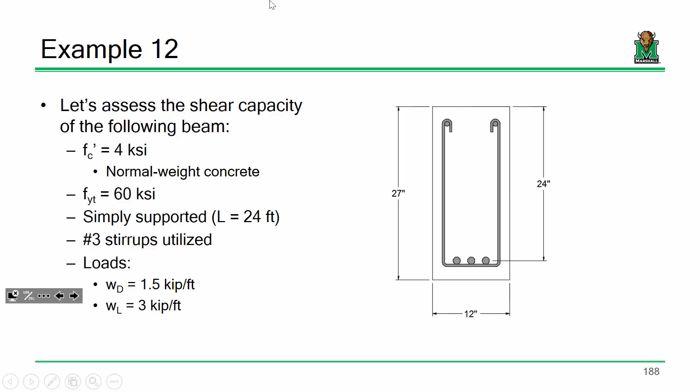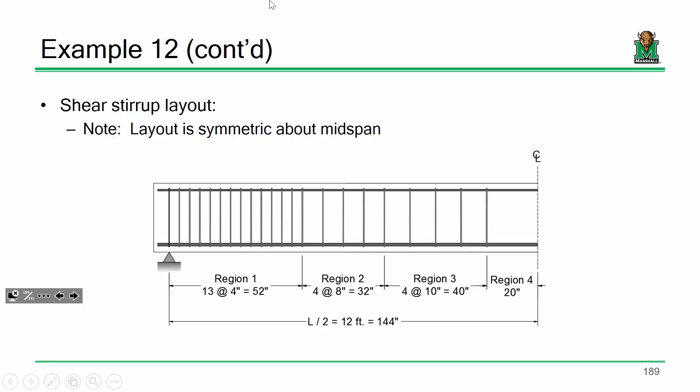So let me start off here. If you recall last time, what we had done is we had taken a beam that had various regions of stirrup spacings, and then based on that layout, we determined the shear capacity along different regions. We noticed that different regions got weaker as we went down the beam because they had fewer stirrups. But that was sort of by design, because if we look at the shear demand, the loads on the beam, it made sense that we spaced those stirrups out as we got away from the support, because the shear goes down away from the support. So as long as our shear capacity is higher than our shear demand,

we're happy. Kind of like economics, right? Supply and demand. You didn't learn anything? See, I'm remembering stuff. It's like a personal victory every time I remember that I need to take attendance.

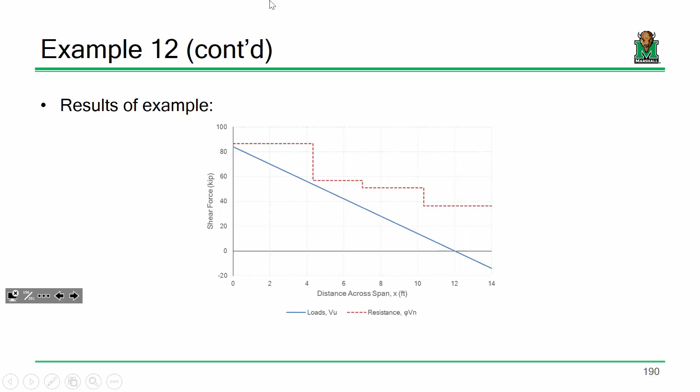Okay, let me turn to the example at hand. Let's talk about how to design. Let's talk about how to actually lay out shear stirrups for a given beam, a little more holistically. I think by now, if I give you a beam and I say the beam's 30 foot long and it's got a factored load of 4 kips per foot on it, you all can size that beam. You can tell me the width, the depth, how much tensile steel needs to go in it, etc. Now what we've got to do is take that design and reinforce it for shear. So that's what I want to talk about.

Remember that our primary goal in any design scenario is that our factored resistance has to be greater than or equal to our factored load. Our factored resistance, if we're talking about shear, is the factored resistance provided by our concrete plus the factored resistance provided by our stirrups.

In design mode, one of the things we need to figure out is how far apart to space our stirrups. If we assume we're using number 3 stirrups, we can calculate AV and FY and all that. The only thing we don't know in this expression is S, the spacing, so we can solve for that pretty easily. That's not so bad - this is literally just algebra and solving for S.

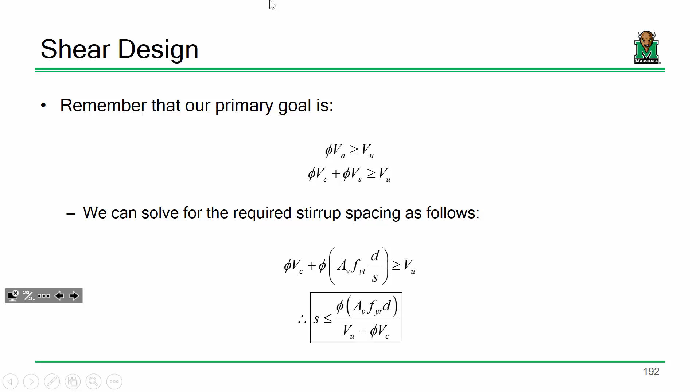Let's look at this expression. Would it make sense that if phi VC is greater than or equal to VU, we wouldn't need stirrups technically, right? That's a fair point just from a conceptual standpoint. However, you all have seen footage of what it looks like during a shear failure, and it's not pretty - it goes quick. So what ACI states, just to be safe and on the side of caution, is that you must...

provide stirrups anywhere that our shear is larger than half of phi VC. So there's going to be a region of the beam where we technically don't need stirrups from a capacity standpoint, but we have to put stirrups there to meet the requirements of the spec. We don't need them for capacity, but we're putting them there anyway because if something were to go bad, it would go bad quick. So that's provision number one.

All right, provision number two: we have to provide stirrups everywhere along the beam. However, if we start getting into contact stresses and bearing stresses right there at that support, it can take some time for those stresses to actually propagate throughout the beam. So the way ACI allows us to kind of take advantage of that is they say...

that we're allowed to actually use the shear value right here to begin our design. I know the shear diagram continues up and is technically a little larger right here, but because we have bearing stresses and it has to propagate throughout the beam, it's kind of like shear lag in a tension member. You know how we put holes in the tension member and it took time for those stresses to propagate throughout the beam? Well, if you've got a support right here and you're applying a shear force, those stresses sort of have to propagate before the beam is experiencing that pure shear.

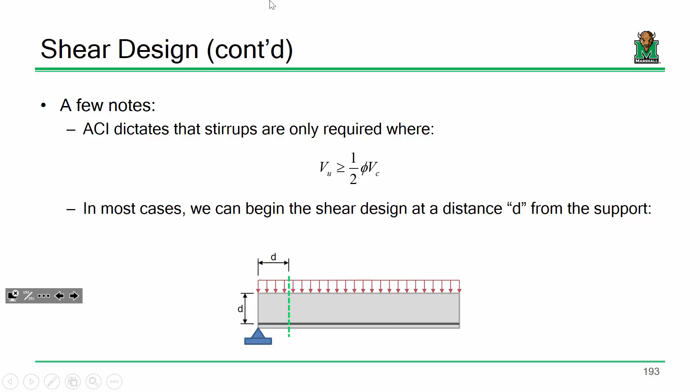So what ACI states is that D away from the support, that's the shear you can use for design. I'm not saying you don't have to put stirrups here, you definitely do, but this is the value you can start to use for design. That'll make sense as we go into a given example. There are a couple instances where we are not allowed to do that - we call this an end shear reduction, and there are a couple instances where we can't.

One instance is if you've got load applied directly to the bottom of the beam - you're not allowed to do that shear reduction because that crack has the potential to propagate a little faster. You're also not allowed to do an end shear reduction on a corbel. If you remember, we talked about the 3rd Avenue parking garage, and you've got those little stubs that stick out of the columns that the beams sit on. There's a fair amount of shear in that, and you're not allowed to do an end reduction there - you have to design for the full shear, because all that shear is going right there, so you're not allowed to do any reduction for that.

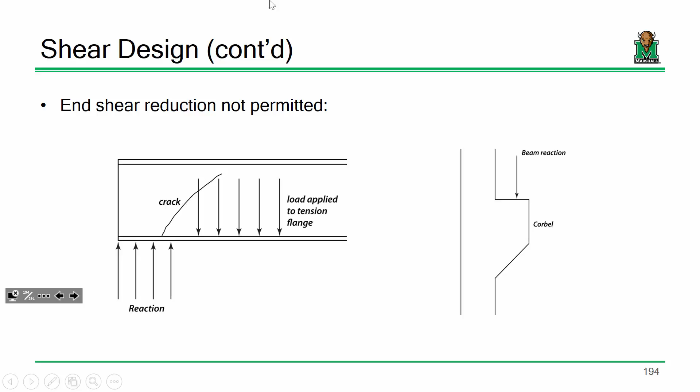So like I said, there's going to be some regions in the beam where we technically don't need stirrups, but we're going to put them there anyways just to ensure we've achieved an adequate level of safety.

So in those regions, what I'm going to do is put stirrups there, but space them out as far as humanly possible. So I'm going to use the maximum spacing.

Our maximum spacing, if you go back to some specs we looked at earlier, is actually a function of what our strength provided by the steel is. I'm going to use the conservative approach and use the top limit. So one of our maximum spacing limits is going to be based off of the capacity of the steel in shear. That's where one maximum spacing value is going to come from.

Another one is going to come from this. We didn't really assess this when we did our last example, but there is a limit that states that no matter what, you have to provide a minimum amount of steel to develop that capacity. If you recall, we had a similar limit for beams—a minimum steel requirement that we checked, and it seemed to never really matter. Well, for us, we're going to use that as an upper bound limit for our spacing in those regions where we really don't need the stirrups.

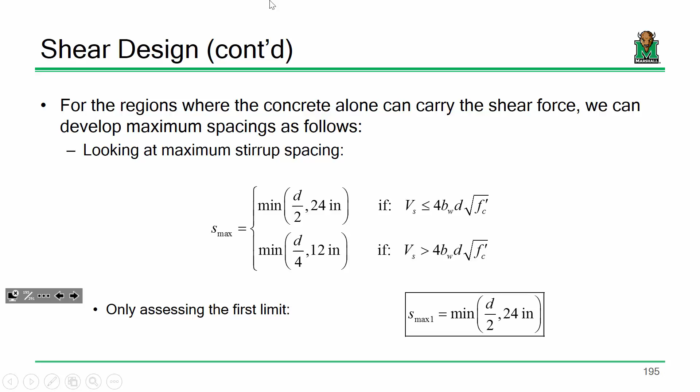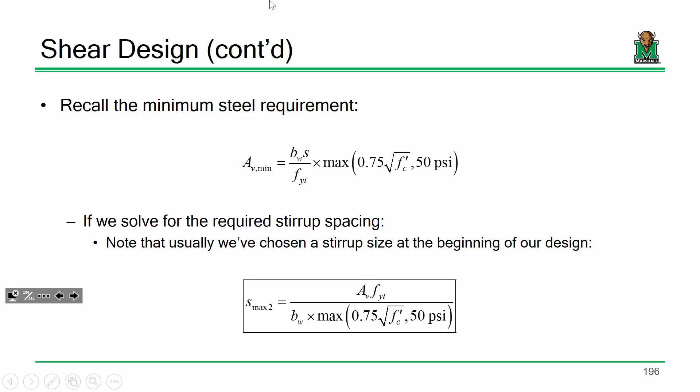Does that make sense? I think as we get into this, you'll see that everything we're about to do kind of washes out in the end. We'll get into some examples where we do this, but we're basically going to compute two maximum spacings, and we're going to take the smaller one. So let me get into the procedure, and once we start getting into some examples, I think this will make sense.

The first thing we're going to have to do is construct the shear diagram for the beam. This shear diagram is going to be fairly detailed. It's not going to be as simple as just a basic shape. There's going to be a lot going on.

We're going to have three separate sections of importance: the section of the shear diagram where we have to have stirrups, the section where we don't really need them but have to put stirrups there just for code demands, and then a section near the middle of the beam. If we're talking about just a uniformly distributed load, we'll have a section where we don't need stirrups at all. So there are three sections of the beam we have to delineate, and that's going to take a little bit of work.

So I'm going to take my time with that. I will admit I probably should have told you all to bring a straight edge, but when we start drawing the shear diagram, my advice would be to draw it on a separate sheet of paper, or draw it really big, because it's going to get kind of detailed.

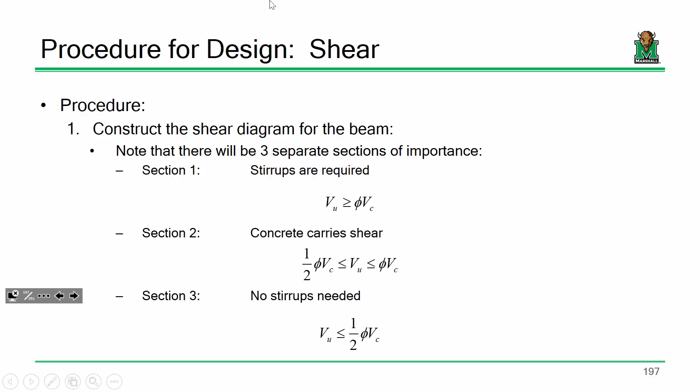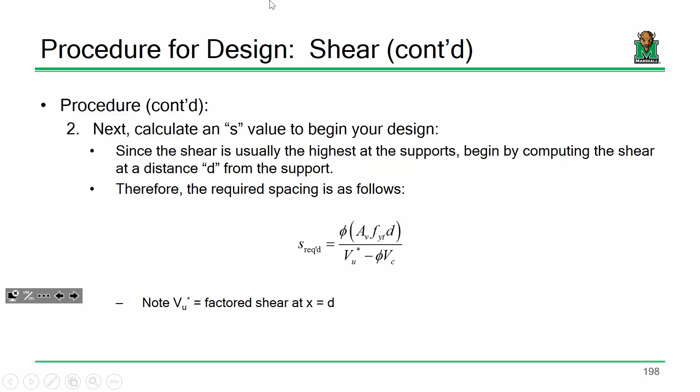Once we get our shear diagram laid out, we need to calculate an S value, a given stirrup spacing to get going. So we're going to start off with the shear distance d away from the support—that end reduction of shear. We'll use that S value to begin the design.

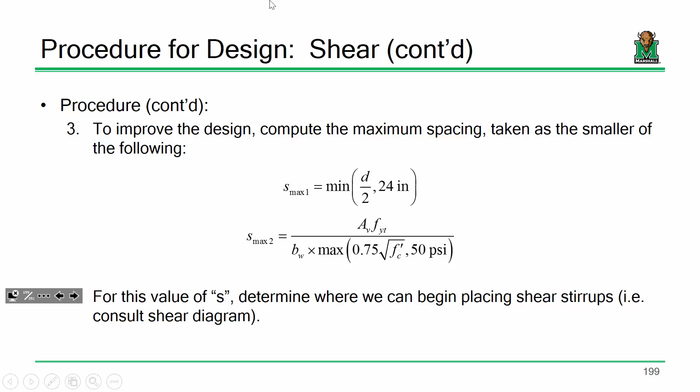And then we're going to improve upon that design by using the maximum spacing in the regions where we really don't need the stirrups, but have to provide them for code requirements and for general safety of the design. Once we've got our S values, we're going to want to start actually laying out the stirrups for the beam.

Step 6, this is where a little bit of experience and common sense comes into play, because you might be able to add some additional increments of stirrup spacing and shave off a few stirrups on your design.

Let me be clear, during homework problems I will make it very clear how many regions you need to provide, and the same thing on exam problems, because I don't want you sitting there laying out stirrups left and right. Once you can do it once, you're good.

As a final step, because we're using this limit—bless you, oh, you didn't sneeze? It sounded like a sneeze. Did you just rip a piece of quad paper off? It sounded like a sneeze. That's why I thought it was. Yeah, okay, I'm not alone, thank you. He thought it was a sneeze, so. Cordiality does not count as a mistake. I was being polite. I mean, I could have handled it differently—I said, will you all stop sneezing in my class?

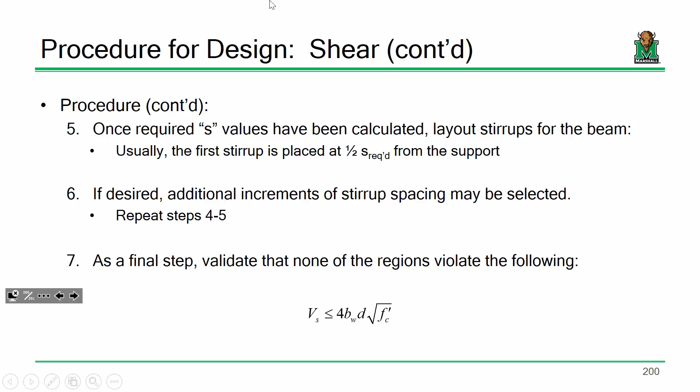As a final step, you do want to make sure that none of your shear capacities violate the following capacity. Remember, one of our spacing limits is making this assumption that this isn't violated, so you'll want to go back and check that.

I think this is one of those design procedures that really begins to make more sense when you start doing it. So what I'm going to do is get into some calculations and construct this shear diagram and lay out the stirrups for the beam shown.

So let's lay this out. We're going to design number 3 U-shaped stirrups for the following beam. So I've got a 20-foot beam, 4 KSI normal weight concrete, and 60 KSI steel.

And to keep things simple, I've given you the self-weight, or the factored load on the beam. So we're saying this is 11.5 kips per foot, so it's actually got a fair amount of load on it. And we'll say that includes the beam self-weight, so we don't need to go through and do all of that. I just want to get into the shear design. All right, sound good? All right.

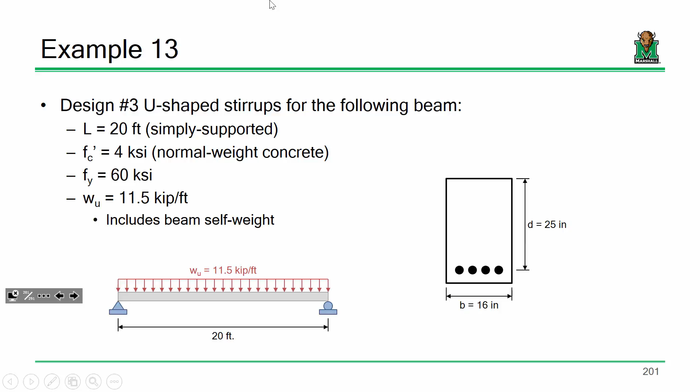One of the things that's going to be important is that we recognize the use of the equations that we derived last time. And if the shear diagram gets a little more complicated, you need to be able to handle that. So let's sort of get into it.

Well, you just need to provide yourself a fair amount of room for it, is all I'm saying, and you'll see what I mean when we start drawing it out. I'm going to actually try and use some of the straight line features in this smartboard software to try and make it neat.

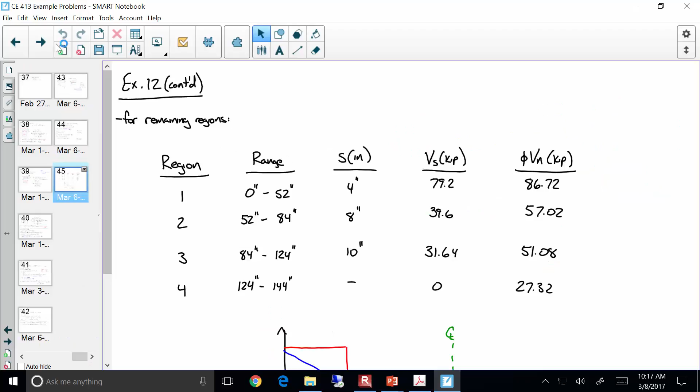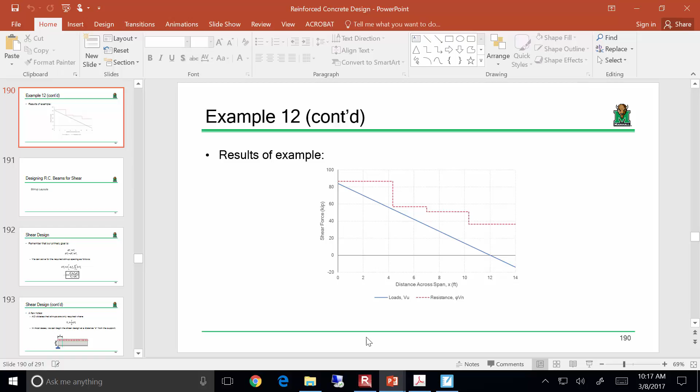I would say that's a good question. I would say that the final answer, to keep it simple, is that the factored shear capacity was always higher than the shear load, so it indicated that the beam was safe.

Okay, all right. So, example 13. All right, so I'm going to write down some fundamental beam properties just to get us started.

So we've got an FC prime of— 4 KSI. There we go. Now it's normal weight concrete, so I'm going to say that lambda is 1. We don't need the beta 1 actually for this. And Fy, or Fyt, doesn't really matter, is 60 KSI.

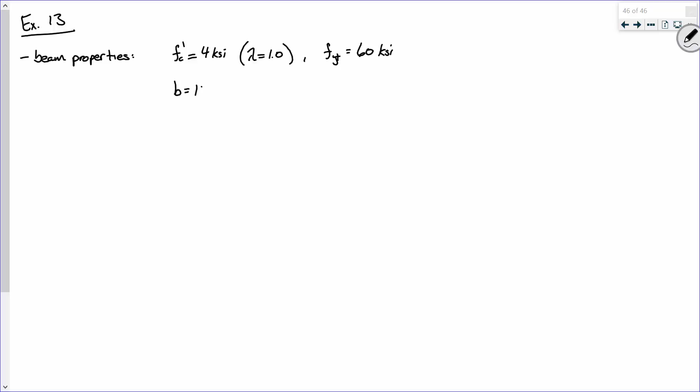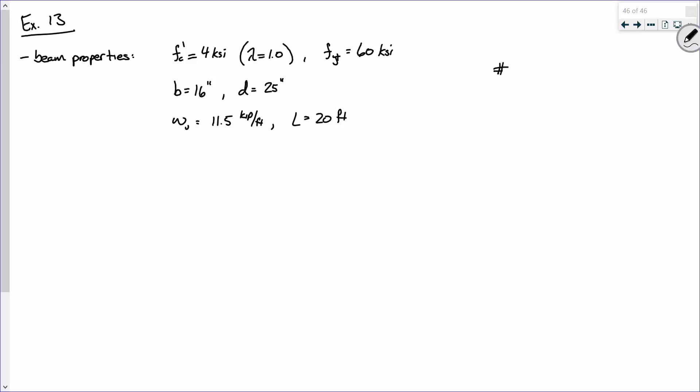All right, now we have a B value of what? 16 inches, and a depth of— W sub U is 11.5 kips per foot, and L is 20 feet. And we have number 3 U-shaped stirrups.

So what is AV going to be? See if y'all remember that. What's the area of a single number 3? 0.11 square inches, so what's AV going to be? 0.22—we'll say 2 times 0.11. Is everybody okay with that?

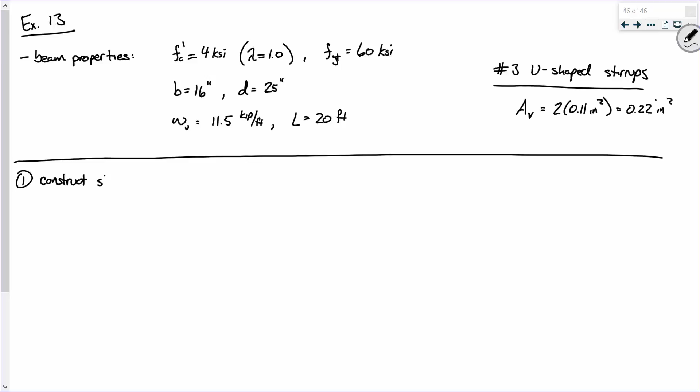Now, step 1 is going to be construct the shear diagram. Okay, now let's be clear, this is a simply supported beam.

And it's a uniformly distributed load.

Okay, now here's how I'm going to handle this. Do you all remember this? VU of X is WL over 2 minus WX. You all remember that? That was the equation we derived last time for a simply supported beam subjected to a uniformly distributed load. I'm going to use that pretty heavily throughout this example.

Now, WU L over 2, just off to the side, is 11.5 kip per foot times 20 feet divided by 2. So 20 over 2 is 10, so that's 115 kips. Does that make sense?

So could I rewrite this as VU of X is 115 kips minus 11.5 kips per foot times X? Would that be a fair way of doing that?

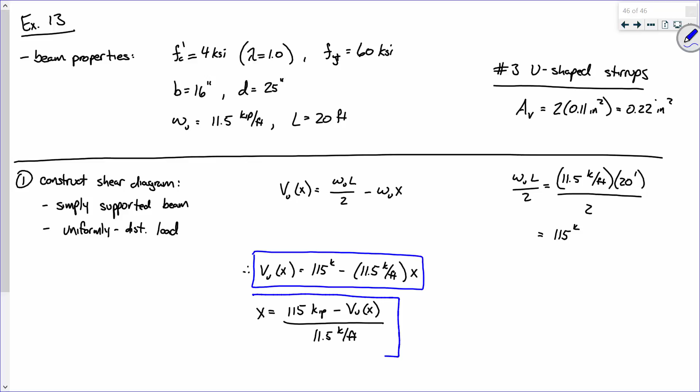All right, so is everybody okay with this equation? All right, everybody okay with that? Here's another equation that I want to write, okay? Would you agree with this? Would you agree with that? All I did is take this equation and solve for X.

So let me explain why these two equations are important. The first equation will tell us what the shear is at a given point along the beam, so that's going to be important to plot the shear diagram. This one, the one on the bottom, will tell us, okay, if I'm trying to find a given shear value on the shear diagram, it'll tell us where it is. So this will help define where we need stirrups and where we don't need them. And based on a given stirrup spacing, it'll tell us where we can start to use that stirrup spacing. So that's really going to be important for us for design.

All right, sound good? Now, let's also be clear, okay? These equations, I'm going to draw it out. These equations only work for this situation. Anytime that changes, all this is different, okay? So you need to be aware of that. Sound good?

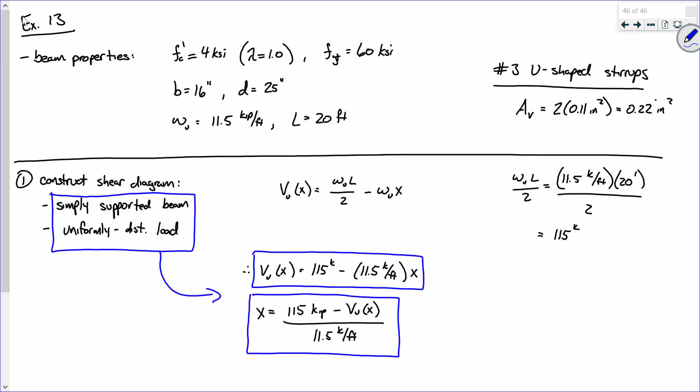All right, okay. Now, while I'm here, I'm going to compute a couple things. Specifically, I'm going to compute some stuff related to concrete capacity. So how do I compute V sub C? If y'all remember that, it is an empirical equation.

Making you all do some research through your notes. Oh no, there we go. So 2 lambda BW D square root of FC prime. So 2 times 1 times what? There we go, 16 inches, 25 inches, again be diligent on that. Times the square root of what? There we go, 4,000. You put in PSI, you get out PSI.

What do we got? Now we'll just keep it to the nearest pound. So is that, everybody got a second on that? All right, so that's in pounds. So in kips, well here, we'll just do this down here. In kips, that'd be 50.596 kips. I'm gonna keep the decimal out a little bit. Now that's VC.

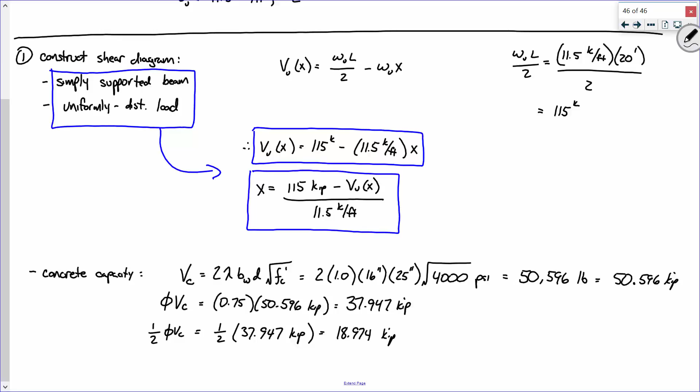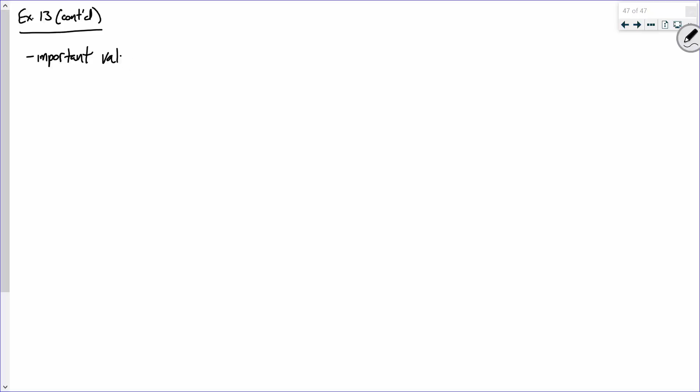Okay, so what I want are some important values for plot.

The first thing that I want is VU star. Now, VU star is just whatever the shear is at x equals d. Since this is a function, we'll say x equals d.

Now, what was our equation to determine shear as a function of x? We wrote it down a second ago: 115 minus 11.5x. Y'all remember that? So to find the shear at x equals d, I'll say it's 115 kips minus 11.5 kips per foot times d. And what's d?

What's wrong? There we go. This is the type of stuff that will mess you up on an exam right here. Okay, so make sure you're aware of that. So what do we got for VU star?

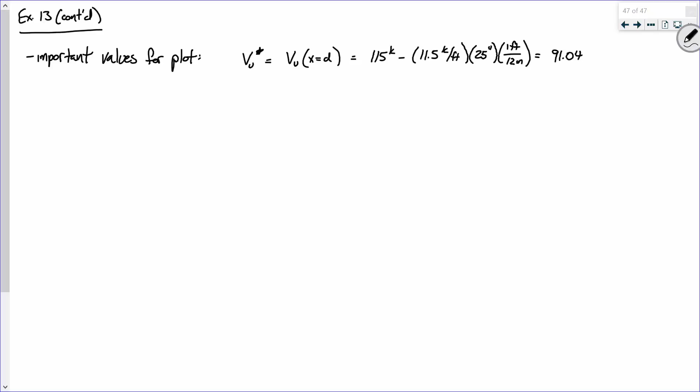So when we start spacing out stirrups, we're going to start based on 91.04 kips. We're going to see how that goes about here in a second.

Now, that's one value. I also want to know the x at phi VC, and then I'm also going to find the x at half of phi VC. So now how do I find the x at phi VC? Well, what's the equation for x?

Essentially another way of interpreting that is x equals 115 minus whatever shear value we're looking for, divided by 11.5. So what I'm going to say is 115 kips minus 37.947 kip divided by 11.5 kip per foot. So what is that?

6.7 feet, which is how many inches? 80.4 inches. Does everybody understand that? Everybody okay on that? And again, don't shortcut. Write K-I-P, K-I-P, or K over F-T. I mean, write it out. Use your pencil and write it out.

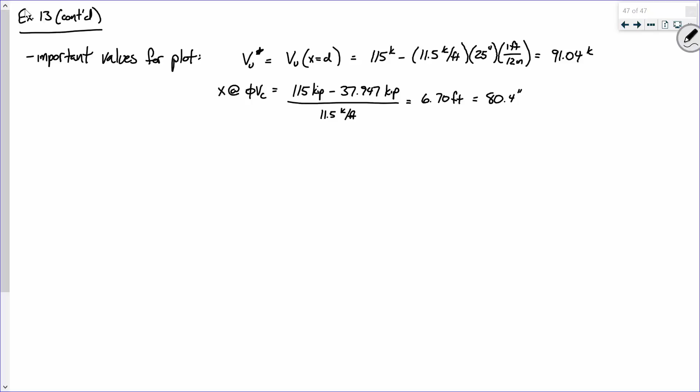So I've got the x at phi VC and the x at half of phi VC. So exact same thing, minus - nope, wrong one. What is half of phi VC? There we go.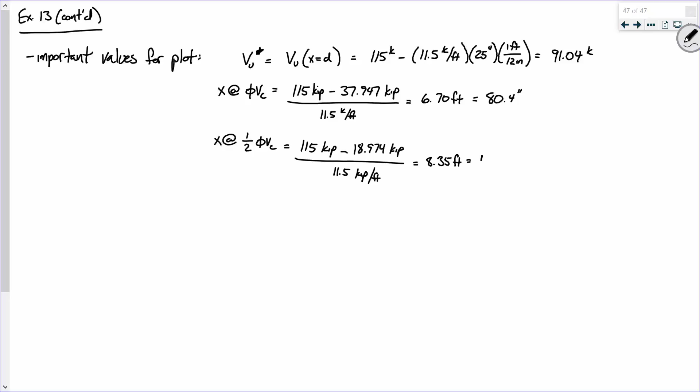And what do we got? And in inches. Everybody okay with that?

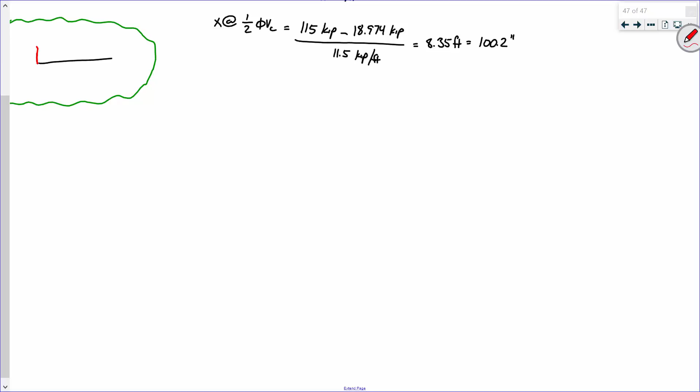Now how long is the beam? 20 feet. So let me just be clear. Our shear diagram, like if I drew a little tiny shear diagram over here, it's going to look like this, right? This is going to be 115 minus 115, and this dimension is going to be 10 foot, right? We don't need a crazy equation to tell us that, right?

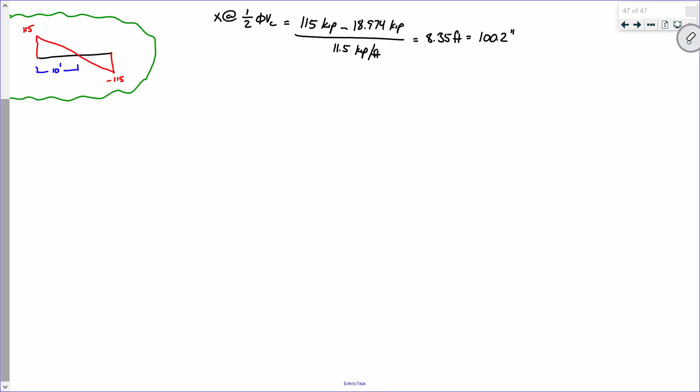Okay, now here's where we have some fun. You know what, I'm just going to be conservative and do this on a new panel. Where are the lines? Oh, there we go. Hold on, I'm just getting reoriented to doing these line commands again. That's because I was using the line tool.

I'm not that good. Okay, so here's what I'm going to do. Let's see, is it? So I'm going to draw an axis. Oh, come on. Hold on, I'm going to get there. I'm going to get there.

All right, so I'm going to draw this, and I'm going to draw that. Okay, sound good? Now bear with me on how I actually draw the shear diagram, because I think it'll make sense when I get into it. You go away. Now let's do the shear diagram.

Let's do that in red. And this is how I'm going to draw the shear diagram. I'm going to say it kind of does this whole thing - oh, well no. I picked the... red. There we go, let's try this again. Oh my goodness.

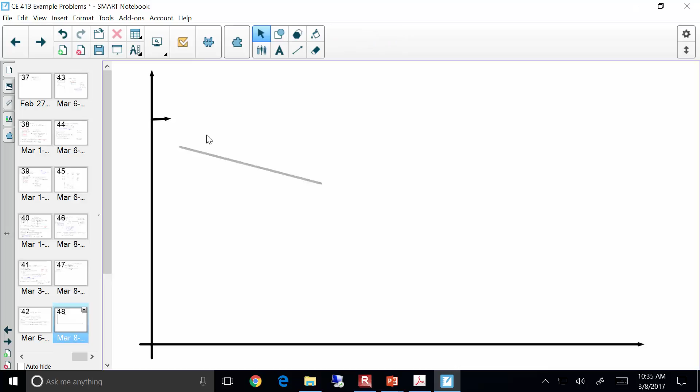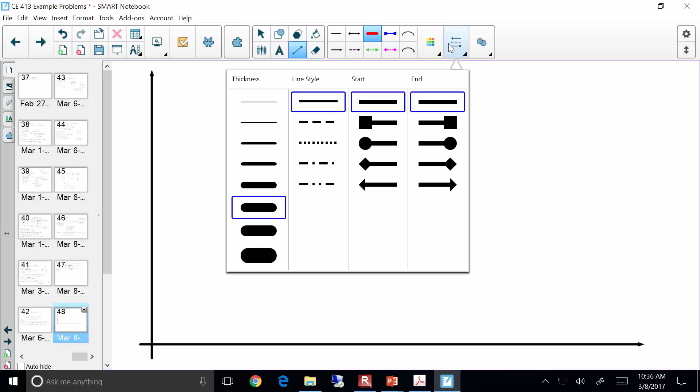What the... Oh. Oh my goodness. This is good. This is going to happen. Okay, we won't use the color, I'll change it later. I will pick the red line. I don't, because it's really... Thank you very much. Well, this is why... This is why I didn't pick the red line. All right, no, I'm going to get this right.

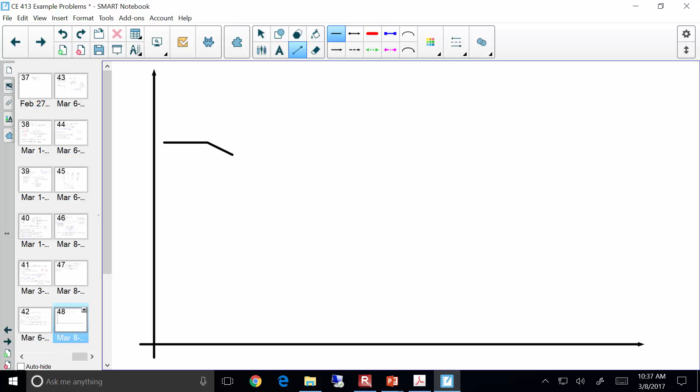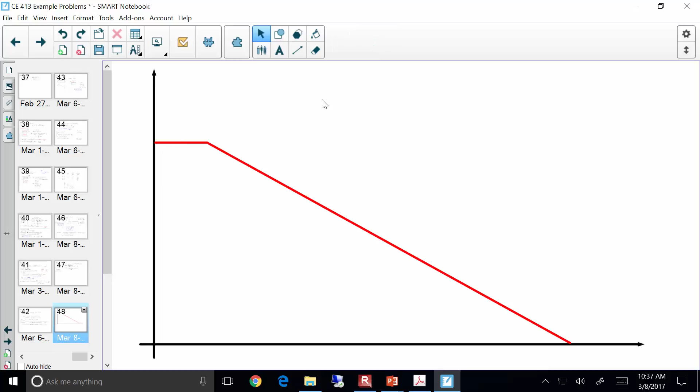All right, this is what I wanted it to look like. Let's see, this should be red. Okay, there, now it worked. Okay, we're not using the pen tool anymore, but I will say that it was probably a good idea that we had the pen tool the first time. All right, so let me just sort of do this.

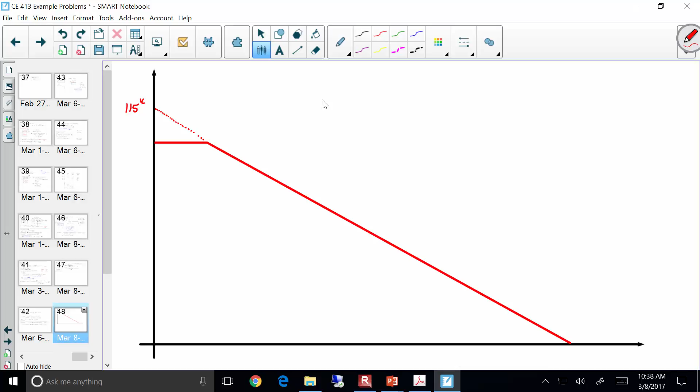Okay, so now the shear diagram should go from 115 to 0. So what I'm saying is that this quantity right here, this is 115 kips. Now, this quantity right here, this is the 91.04. All right, I'm getting ambitious and we'll try something. And what I'm saying is that this cuts off at a given value. So let me do that, and then now let me reformat.

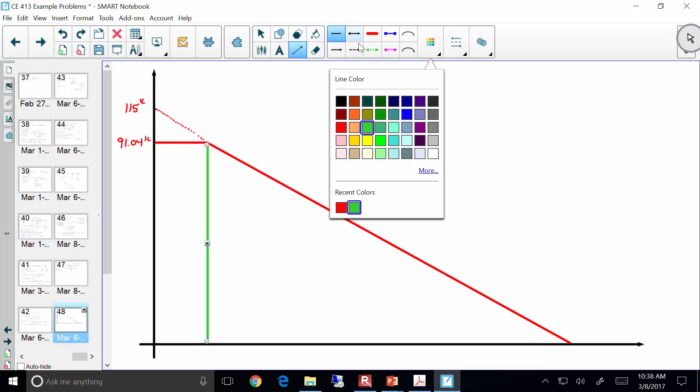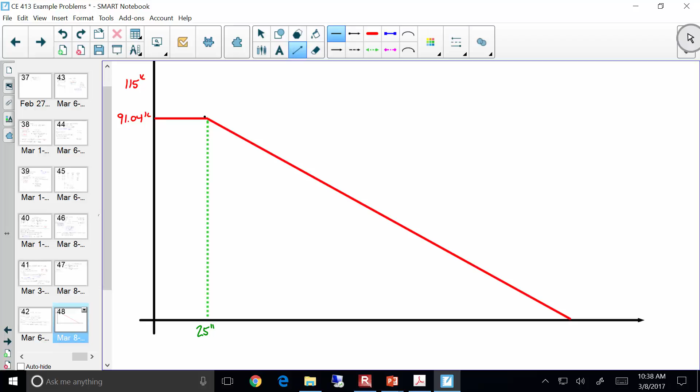That's how I should have done it this whole time. Okay, now I say that this cuts off at a value of about 25 inches. Okay, so actually, let me see what I can do here. Hold on.

What do you mean the axis down here on the bottom? Like this is 0 inches. Okay, this axis is the x, and I'm going to put this in inches. And I'm going to say that this one is the shear in kips. Is everybody all right with this?

Now let me ask you this. What is the x value right here? 120 inches, exactly. So what we'll say is this is 120 inches, and this line right here, now that I understand how this works, that's the center line of the beam. Everybody all right with that?

Now, we indicated two other points: phi VC and half of phi VC, right? Now, what was phi VC? Okay, 37.947. So if I try and go to scale, that's about right there. That about right? I'll give that a different color. Make that purple. So that's phi VC, right?

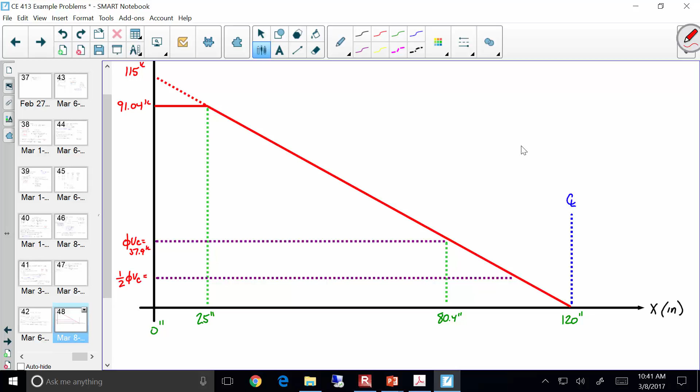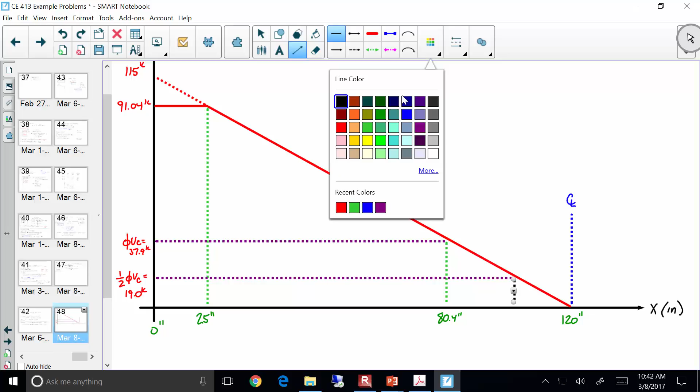That is about half of phi VC. And that was what, 18.9 or 19.0, something like that? Just for this, close enough. And that was at a dimension of right here. Didn't we get 100.2? Isn't that about right?

Okay, sound good? Everybody all right with this? Now let's talk a little bit about the three regions. So what I'm saying is we've got three regions of the beam, from here to here, this region from 0 to 80.4.

This is the region of the beam where all the shear values are larger than phi VC. Would you agree with me on that? So anything larger than this is where we have to have stirrups. We need stirrups there to keep the beam safe.

Make sense? Anything between here and here, once we cross this point, the concrete takes over. In other words, we technically do not need stirrups past 80.4 inches because everywhere past here, the shear gets lower and lower. Make sense? So that's that region. Now everything past 100.2, we don't need to put stirrups at all. Everybody okay with that? So here's what I'm going to do.

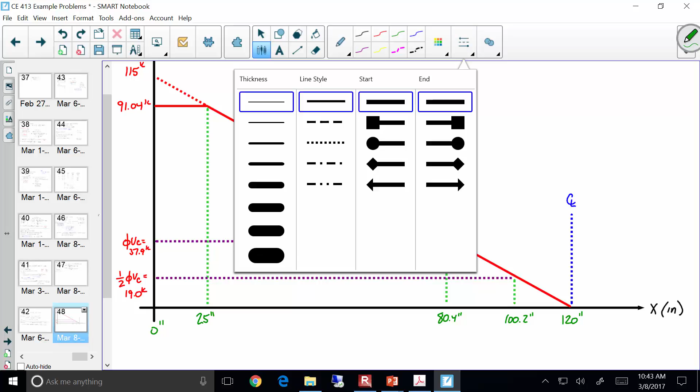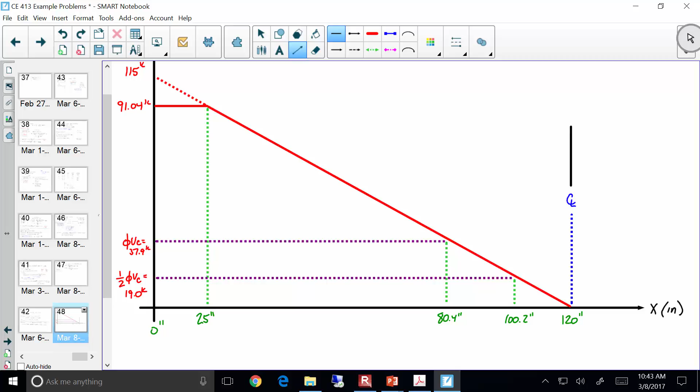I'm going to label these regions as follows. All that blue.

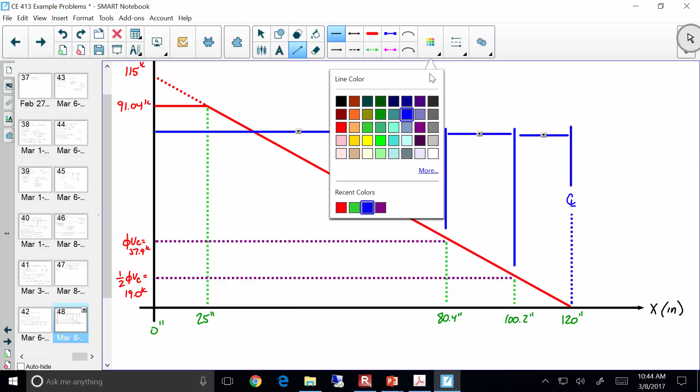So this region on the very right, I'm going to say this is no stirrups required, okay? This region right here, I'm going to say the concrete carries the shear. And this region, I'm going to say stirrups needed. Okay, is everybody with me on that?

So what I'm saying is that this is sort of the gut check. If I start laying out stirrups, I can go from x equals 0, and I can lay out stirrups until I get to an x value of 100.2, and this is where I stop. Is everybody with me on that? Okay.

All right. Apologies for the technical difficulties, but in all honesty, I think it was necessary to get it right because I'm not that good. Okay, does this make sense? Anybody have any questions on this?

CT. CL, center line.

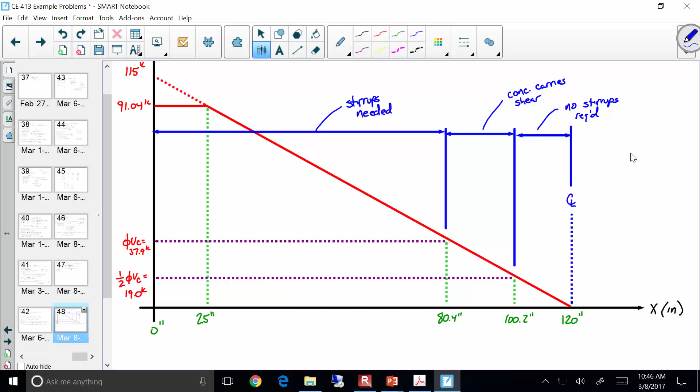All right. What I'm going to do is very quickly propose a design, and then as soon as I do it, I think you all are going to be able to tear it apart and say we could do better. And let's sort of see what happens.

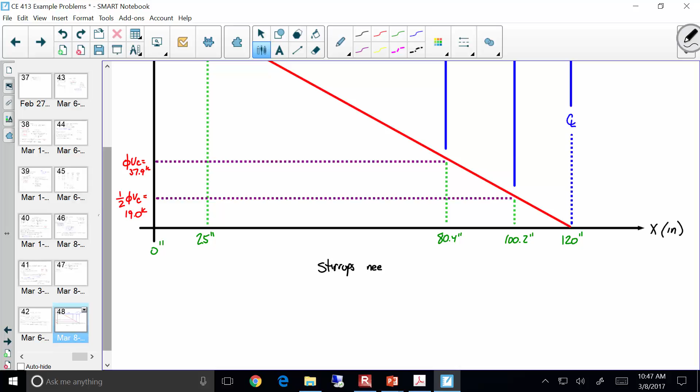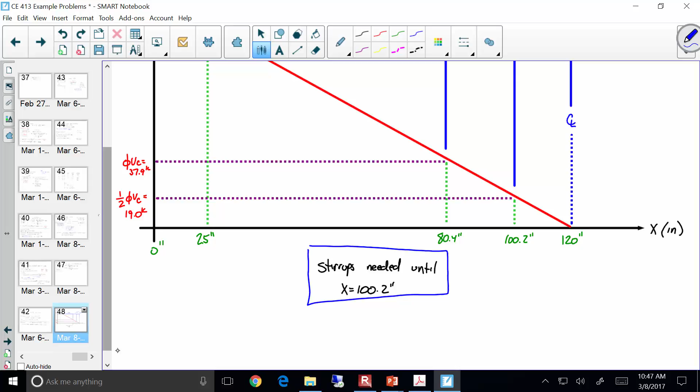All right. Do you agree that we need to provide stirrups up until x equals 100.2? Everybody okay with that? So I'll put stirrups needed until x equals 100.2 inches. Like that right there is going to be our guiding principle throughout the entirety of this example. Everybody okay with that? Okay. If you're okay with that, then let's do a design, and then let's see what's wrong with it.

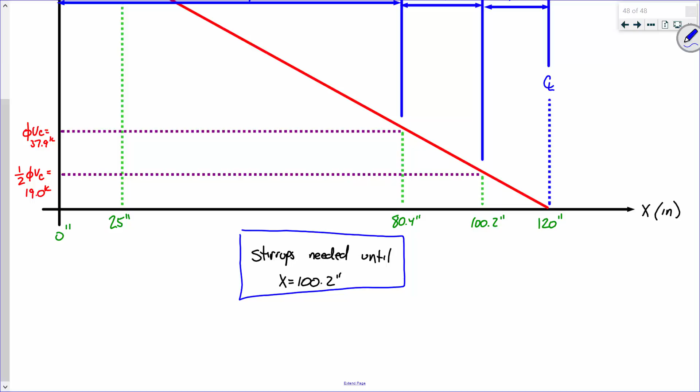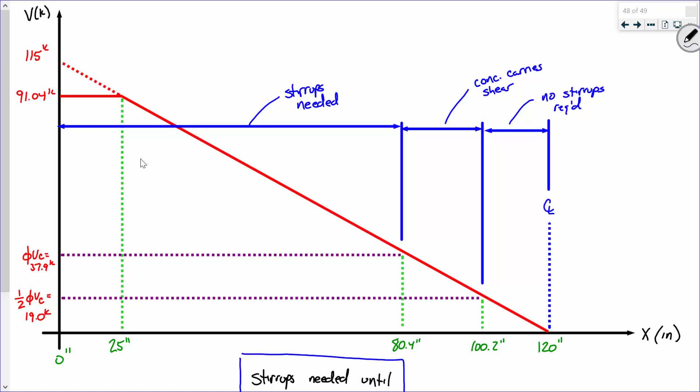Okay. Has everybody got everything on this slide? We've done 49 slides worth of calcs. All right. So we're going to do step 2 of the design, which is essentially the starting S value. Okay. Now the way I'm going to do that is I'm going to determine the required spacing essentially right here. I'm going to determine the required spacing for this shear of 91.04 kips. So we're solving for what spacing do we need to safely resist that shear.

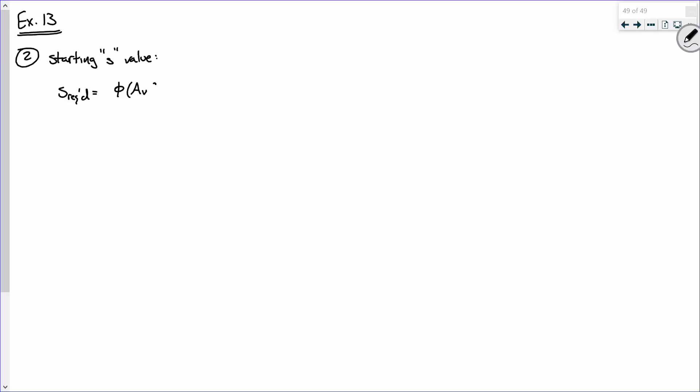Now, that was pretty good. Pretty good. 4.66. Okay. Now let me ask you this. Do you think you're going to go tell a contractor to space up stirrups at 4.66 inches? No, no, all right, no, hold on. I want to address that. Now, 5 or 4, right? We're going to go down, not up, right? We're going down. If you say S equals 5 inches, a larger spacing is a weaker beam, right?

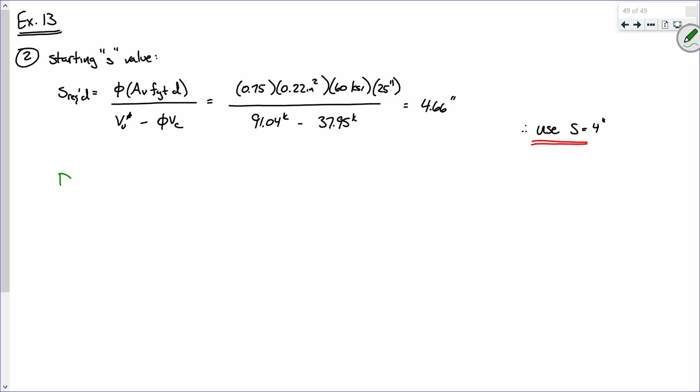So to keep it simple, just to keep it straightforward, I'm just going to say, you know what, let's just use S equals 4 inches, all right? Now, we'll lay this out, and then we'll call it for the day. Use S equals 4 inches. I would, yeah, keep it simple. Okay, so what we're going to produce, and then we'll call it, is design 1. Okay?

Design 1. Now, so we're starting at the very beginning of the beam at x equals 0. Okay? Now, it's very typical to place your first stirrup at about half that spacing. So I'm going to put one stirrup at 2 inches. Okay? So I've got the beam. And I'm going to put my first stirrup right here where this is 2 inches. Then, no. We're going to go the whole way. All right, so we're going to have 4 inches, 4 inches, etc.

My question to you is this. How many stirrups do I need to place at 4-inch spacing? No. Up until where? 100.2. And how many spaces do I need? Think about it. 24.5. So why not keep it simple, just say 25? We want to go past that, right? So let's do 25 stirrups at 4 inches, which is, that's 100, right? So in total, that would be 26 stirrups covering a distance of 102 inches. Would that sound reasonable?